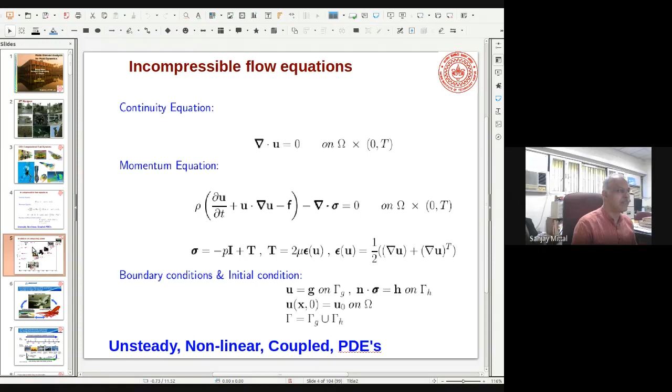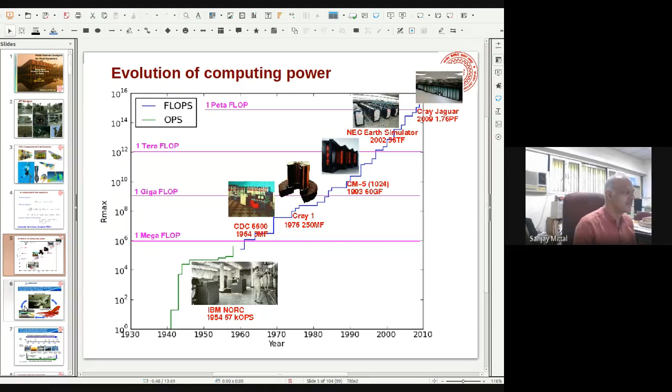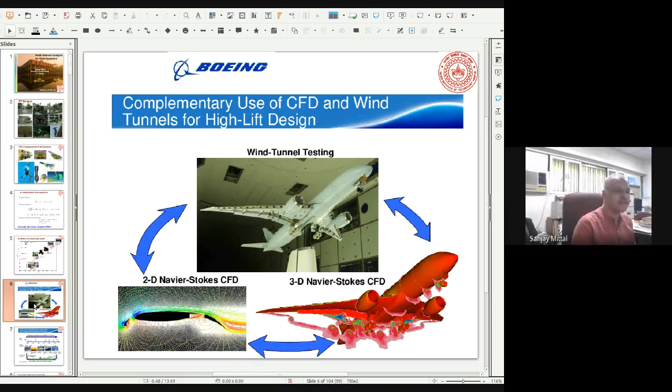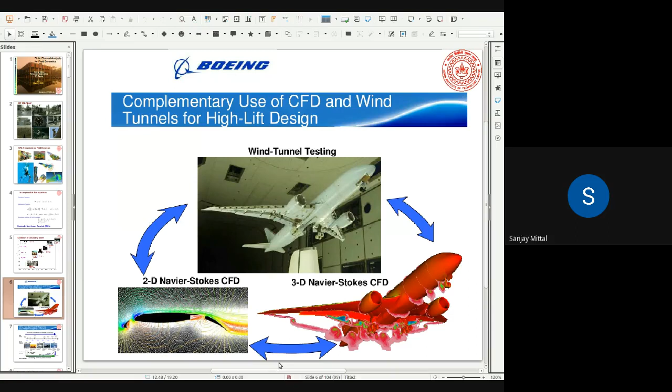But just to give you an idea that we are talking about not just in a laboratory scale. People are actually using this in commercial setting. So here is a slide from Boeing where they suggest that all their studies are done using these three tools: 2D CFD, which is kind of cheaper, then the high fidelity three-dimensional CFD, and then of course the main wind tunnel testing, which people swear by.

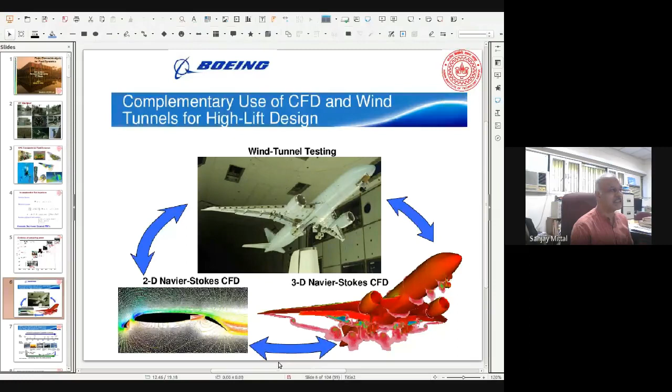So what typically they would do is they would do very few tests with wind tunnels, and most of the tests are done using 2D CFD, and very few tests would be done with 3D CFD. And wind tunnel testing is just used to kind of validate the data and make sure that everything is working fine.

Here is a picture again from Boeing, which kind of tells us what is the level of tools they have used over the past few decades, and what is the complementary effect of CFD and experimental aerodynamic study. So the top row shows the tools. So they had some panel codes, Cartesian grid techniques, then they had some finite volume codes, and in fact now they exclusively use finite element codes on unstructured grids.

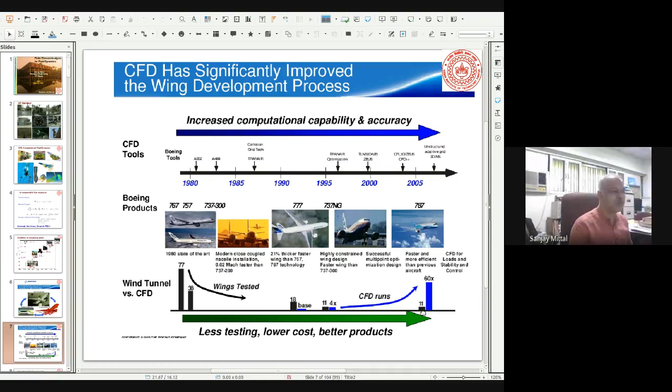And in the second row you see their products, okay, the 767, the 737, unfortunately, which is going through a crisis, and the Dreamliner and so on. And on the last row you see the tests that they have done. So you can see back in the 80s, most of the products that they designed, they heavily used wind tunnel testing. But now if you look at the newer designs like the 787, they use mostly CFD and very few wind tunnel testing. So there has been a certain shift.

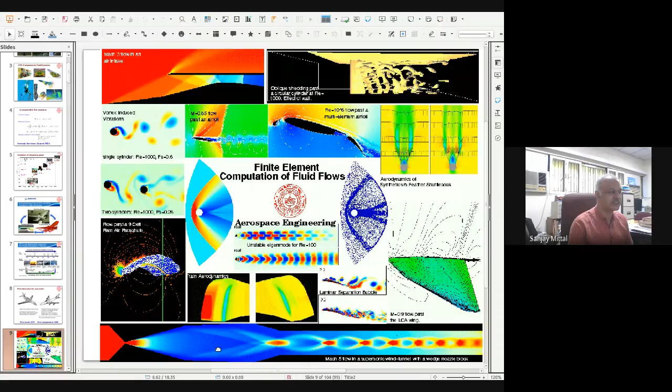There was a project we undertook for trains. So what if we want to retrofit some locomotives for higher speeds? So this was sponsored by the Indian Railways. They wanted some quick answers because there was some plan to increase the speed of all locomotives across the nation. I'll show you some examples of ram air parachutes, so I will not say much about that here. And then if you want to design wind tunnels, high-speed wind tunnels, you can actually use CFD to do that.

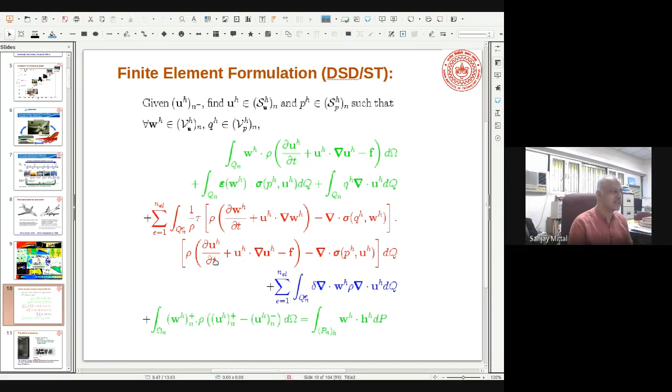And then the blue and the red terms are essentially the stabilization terms, because it turns out if you just use the Galerkin method for these parabolic equation systems, which may actually tend to hyperbolic for high-speed flows, then you can get all kinds of instabilities. So you have to numerically add some terms to stabilize them. So we use something called the SUPG, the streamline upwind Petrov-Galerkin, and the PSPG, pressure stabilizing Petrov-Galerkin, and some other terms for least squares of the continuity equation. So I'm not going to give you too many details about this, but if there are questions at the end, maybe I can address them.

Okay, so once we have an algorithm, the next challenge is to put it in a parallel framework so that we can actually do large scale problems. Okay, so shown here is the first Linux cluster that we acquired at IIT Kanpur from DST, and this had 32 nodes, 64 processors, and the backbone was a gigabit switch.

So what we want to do is, because it's an unstructured mesh, we really want to make sure that each processor receives some elements, but the communication between them should be as little as possible. They should kind of work independently. So we use this domain partitioning technique, wherein we divide the whole domain into these partitions so that the elements at the interface are minimal.

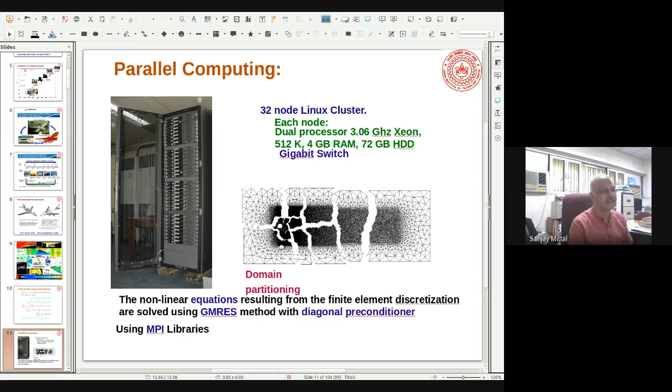Okay, so essentially the idea is that you make volumes which have least surface area. That's the kind of approach that one takes, and then you distribute each one of these clusters to a processor on your parallel machine, and then let them compute in parallel. And of course, they would need information at the interface, but hopefully that information is not so much, and therefore you can get fast calculations.

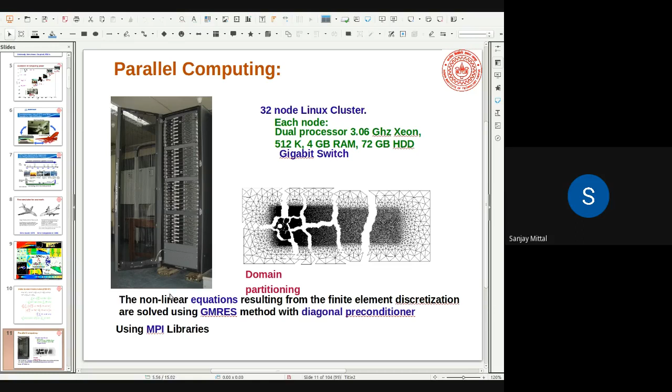And typically we use MPI libraries, message passing, and the solver that we use is based on GMRES with some preconditioners. Typically the data structure consists of three levels: the nodes of a mesh, then the elements, and then the equations. Those of you who are familiar with the finite element method will realize that the integrals over the domain happen over elements, but the information is stored at nodes, and of course calculations are done at an equation level. So one has to go back and forth between this triad and make sure that the data structure is efficient.

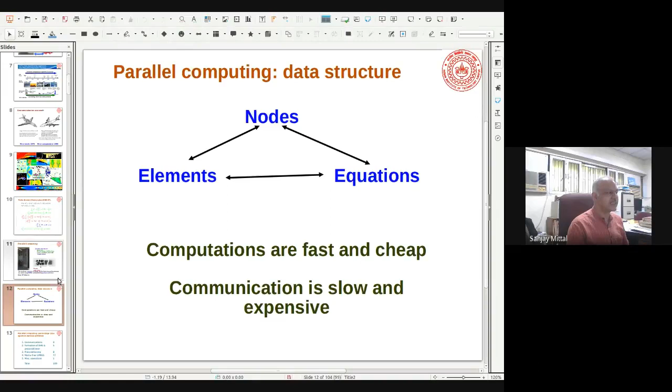So the underlying mantra is that calculations are fast, but communication is expensive. So you want to communicate as little as possible. Of course, you cannot eliminate it, but you want to minimize it. So that's the underlying design of the algorithm. Just to give you an idea about the time that one would spend in various activities: in the codes that we have, you spend almost 80% of the time in the solver, Ax = b, and the communication uses only about 10% of the total time.

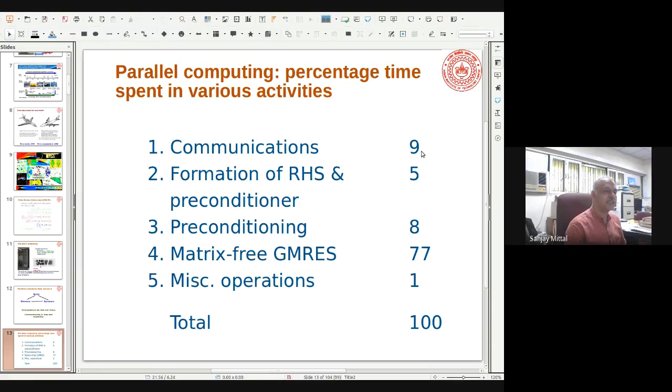Okay. Now mind you, as you go to larger machines, if you take bigger problems and you have bigger computers, then of course you would have more processors to communicate with, and the processors also become faster. The processor that we have today is much faster than what we had maybe 2 decades ago. But communication has not increased speed by the same level; that has increased at a very small rate. So as you get faster and bigger computers, you can churn out things faster, but then the communication becomes a bottleneck. So one problem with scaling up these calculations is that with time, as your computers get faster, your cluster actually becomes more inefficient.

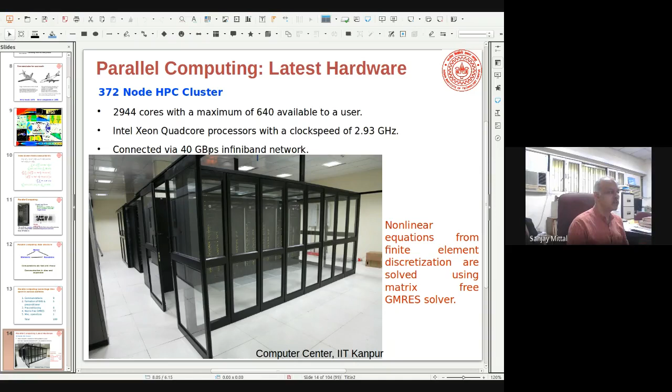Okay, so this is a computer that we have at our institute. It is shared by the whole institute, about 3,000 cores, and roughly 640 would be available to a user because multiple users are running jobs. And the backbone is an InfiniBand, about 40 gigabits per second. So I want to show you some scaling studies of how these calculations scale up. We talk about something called a speed up.

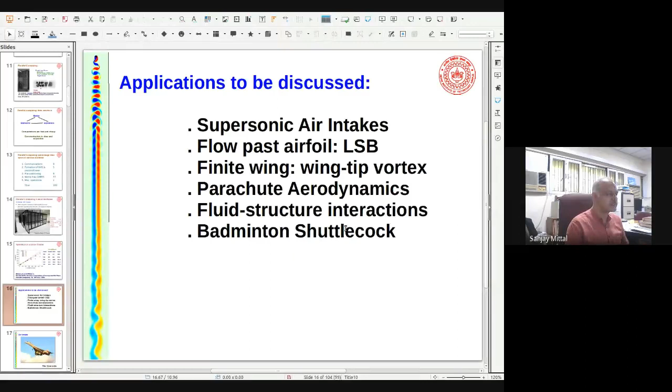Then we will talk about an airfoil, then an airfoil being modified to a finite wing where you would get a wingtip vortex. Then I'll give you some ideas of parachute aerodynamics, some fluid structure interactions. And this last one is really time permitting. I don't think I will have enough time to reach there. But if I do, because I have interest in sports aerodynamics, I'll show you some analysis that we've done for badminton shuttlecocks. Okay, so first air intake.

Please excuse me, I'll just take a drink. Just my throat is getting parched. Sorry about that. All right, so maybe I'll just check. Dr. Thakkar, is everything going okay? Are you able to hear me? Yes. Okay, great. How much time do I have, roughly? You are still having about 45 minutes. 45 minutes, great. Okay, thank you.

Essentially, there are these engines which power the aircraft. These could be turbojet engines, these could be turbofan. For the Concorde, they are actually turbojet engines, and these are called air-breathing engines in the sense that as they fly, they capture the air from the atmosphere, and that air is mixed with the fuel inside the engine, and the burnt fuel and air mixture is expanded through a nozzle, and that's what gives you the thrust. And of course, there could also be a fan which gives additional thrust.

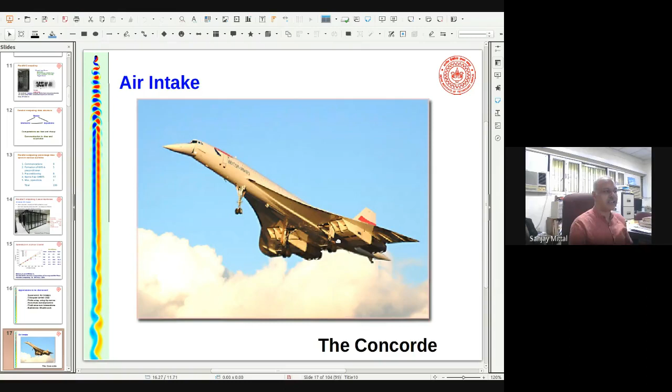So let me show you the next picture. This is a closer view of the air intake of a Concorde. The air goes in through these pods, and there are engines downstream of it. So the high speed air should be slowed down to low speed, and it should be done in an efficient manner, in the sense that the kinetic energy should still be converted to high pressure, and the engine should receive a mass flow at a uniform velocity profile.

Okay, so that's the job of an air intake. It's a passive device, but the design is very important. Otherwise, you would get all kinds of problems with the engine.

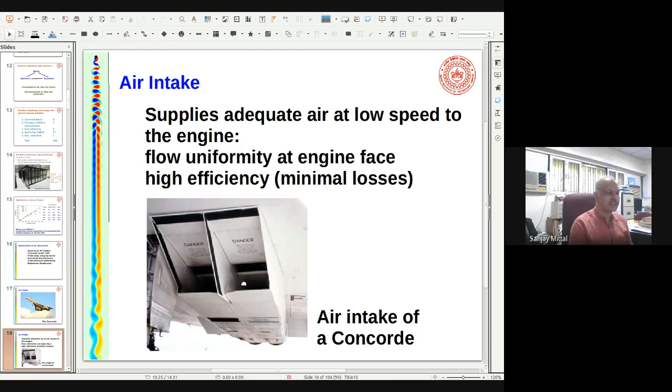Here is a more complex air intake for a reusable launch vehicle or something like a space shuttle. So on the belly of this aircraft, you would have an engine, and a close-up view is shown here on the lower view graph.

So there's high-speed air coming in, then you would like to slow it down through a set of shocks. So you can see there are two shocks, first one at one ramp angle, then another one, and then hopefully there's a strong shock here, a normal shock, after which the flow becomes very slow, subsonic. Then you inject fuel, the combustion takes place, then you expand it, and that's what propels your aircraft.

So we would like to do the analysis of this air intake and understand the dynamics of it, what one can do or what one cannot do. So let me therefore explain to you. Maybe I go to the previous slide and explain to you from the pilot's point of view what the pilot sees.

So the pilot is sitting in the cockpit, and he is controlling the speed of the vehicle through a variety of parameters, but primarily through throttle. Throttle is essentially the fuel control. So when the pilot wants the aircraft to move faster, he increases the fuel flow rate. So he puts in more fuel, just like in a car you would step on the gas.

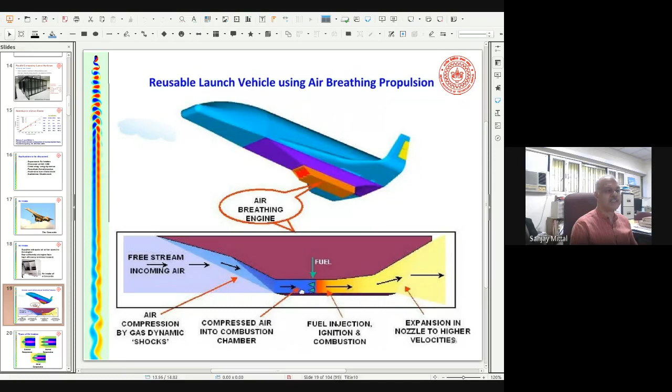So when you go to high speed flows, you can essentially have these different kinds of intakes. So this is an external compression intake. You can see in this view graph, there is an engine cowl. You can think of it as an axisymmetric engine. So the black line is the engine cowl, and there is a center body. This forms a conical shock, and then a normal shock exists at the lip of the cowl and the center body.

So this flow is subsonic. That's why it is shown in dark blue color. So this is totally external. All the compression is taking place external to the engine. Then you could get a situation where the entire compression is internal, where you can see the engine cowl is shown here, the center body, and there are these series of oblique shocks. They reflect, and then you get a normal shock, which does the final compression, and then the subsonic flow, wherein you can burn the fuel.

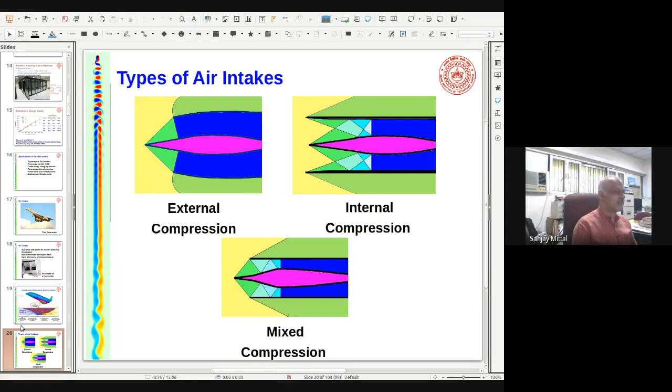Or you could get a mixed compression where the center body is slightly outside the cowl zone. So you get the mix of both external and internal. If I look at a mixed compression air intake, which is what I will show you, then you could have three kinds of operations.

The supercritical operation, where you get a series of shocks, and then the final shock that you get, the normal shock, is downstream of the throat. Throat is the minimal cross-section area of the engine. Now this is a stable situation.

So I am not going to elaborate on why, but please take my word for it, that an engine would be stable if it has an operation such that the normal shock is downstream of the throat. Okay. So this is a good operation. The only problem is that the efficiency is low.

As you are aware, there are losses across a shock. So I would like the shock to be as weak as possible to get minimal losses. The shock is weakest when the Mach number is close to 1, and that happens near the throat. So that leads to the critical operation. So this critical operation is the most efficient operation, but it is marginally unstable in the sense that the shock is sitting at the throat.

If there is a small fluctuation inside the combustion chamber, this shock can move upstream, and the moment it moves upstream, that would lead to a subcritical operation, which is unstable. So this is very dangerous, the subcritical operation, in the sense that this shock will be thrown out of the engine, and there would be very few air particles that come into the engine, and the engine would get starved, and you would get virtually no combustion. Okay, so that's dangerous. You don't want to do that.

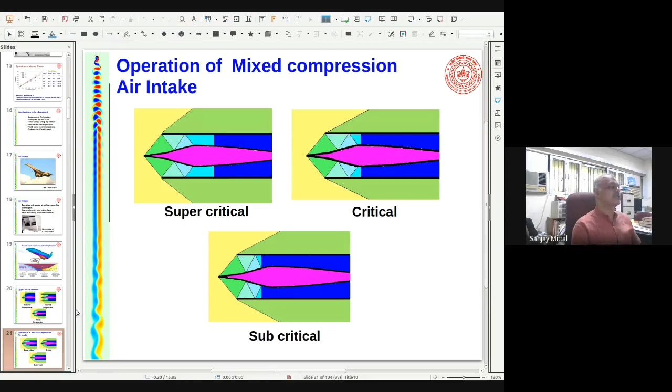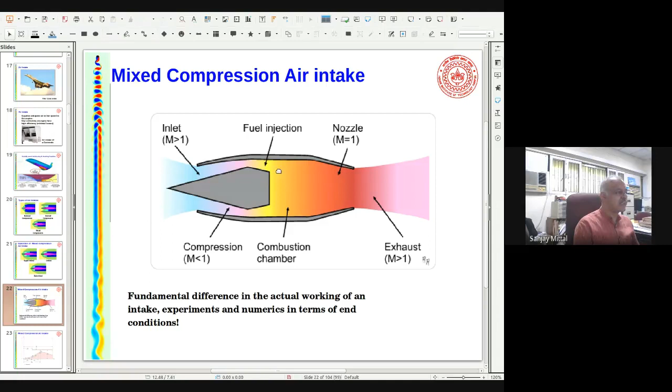Okay, having shown you the physics, now let me show you some CFD results. So here is a model of an engine where we will not worry about the combustion. So we are only going to worry about the air intake part and apply a back pressure simulating an engine and look at the performance of the intake. So this is the geometric model.

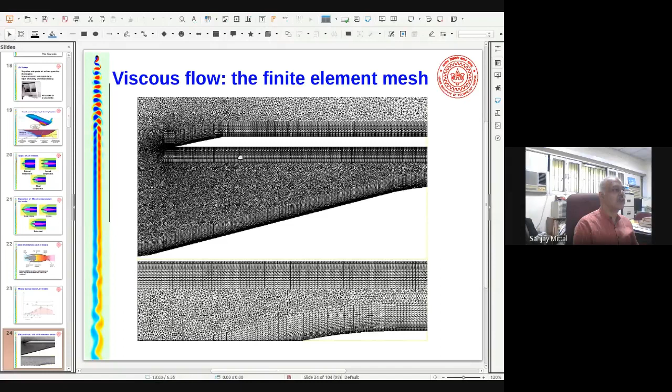So we will have two ramps, a shock coming from the first ramp hitting the lip, another one hitting the lip, then some reflections, and then the throat, and we would apply a back pressure downstream of the intake, which of course is feeding an engine, but we are not simulating the engine. Okay, this is a finite element mesh. So we have a fine mesh close to the cowl of the engine, to capture the boundary layer and so on.

Typically what aircraft do is they apply boundary layer bleed. So there's a perforation on the cowl and the ramp, and some boundary layer is sucked out, and therefore you can control the boundary layer and get a good flow. So the first question we asked is, what kind of bleed should we apply? Where should we apply the bleed?

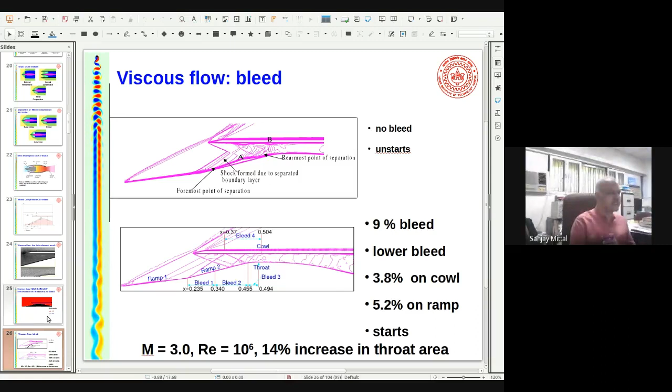So calculations were carried out. So this is a picture of the case with no bleed. So we kind of figured out where the boundary layers are separating. Then we applied bleed. So here is an example where we applied 9% bleed both on the cowl and on the ramp, and that leads to a start of the engine. So let me show you an example. So this was without the bleed. Now let me show you an example with bleed.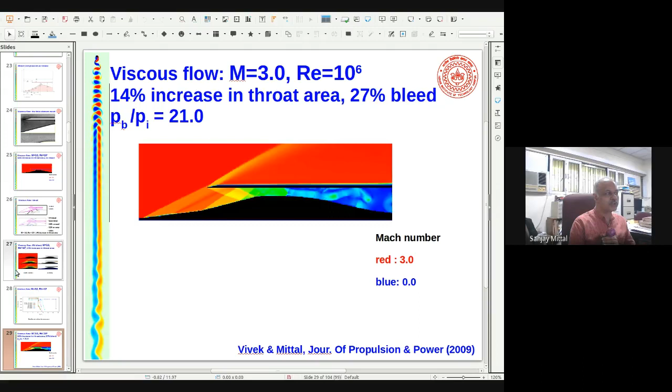So one of two things can happen as you increase the back pressure. A, the engine can completely unstart, and that's the end of the situation. Or you can get an instability which is called buzz. Okay, so buzz, as the name suggests, is a buzzing sound, a very high frequency sound, where the boundary layers and the natural frequency of this engine duct interact, and the shocks will go back and forth. So I want to show you some animations of a buzz instability.

So I'll show you two types of buzz instability. There's something called a little buzz and another one which is called the big buzz. So the little buzz is because of shear layer instability. It's a little bit weak, and the big buzz is really very heavy instability, which is driven by the acoustic waves, and they are both driven by the acoustic modes of the pipe. So the resonant frequency can be determined by the pipe.

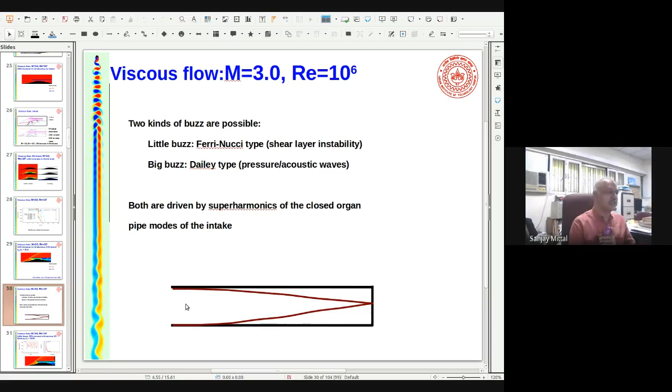So shown here is a quarter wave inside a pipe. So you can imagine that there's an engine which is applying a back pressure, so that's like a closed end, and then there's an intake which is the open end, and a wave could sit here. And so here's an example of a little buzz. Please take some time and enjoy it, and I'll explain to you in a moment.

I'll now show you an example of a big buzz. So here is a big buzz, which is actually very high frequency, and you can see massive flow separation, driven by a completely acoustic instability. You can see massive flow separation. Okay. In fact, it's interesting.

So if you look at each cycle, for the majority of the cycle there is flow going through the engine, but then there is a part of the cycle in which the flow reverses. So the flow goes from the plenum back into the throat and outside the air intake. So it kind of spills over the cowl, and that's not healthy. So you don't want the pilot to go through this instability.

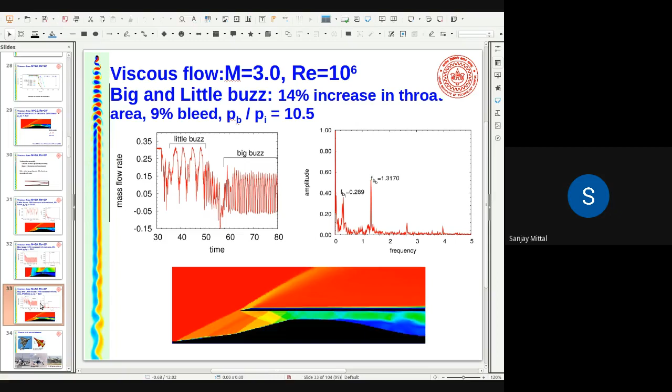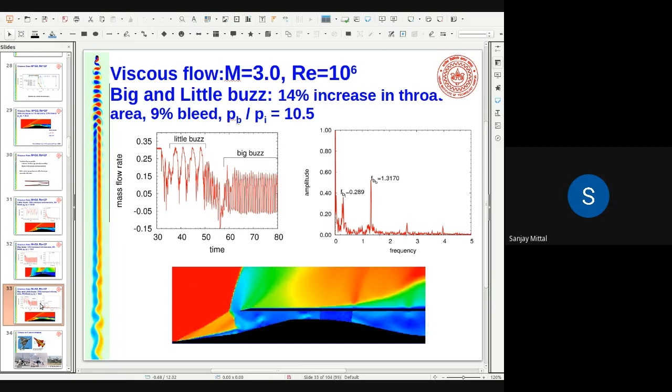Okay, you can get an instability which starts with a little buzz and then goes into a big buzz. So here is an animation. I'll just play it so that you can enjoy it. So this is a little buzz, and at some point it will become a big buzz. Yeah, here you go. Now it has become a big buzz, a massive flow separation.

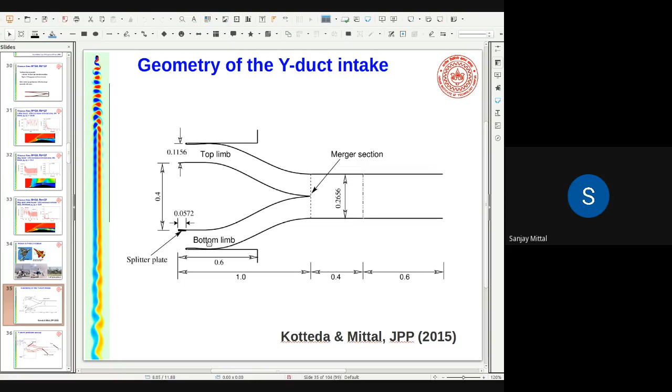Okay, so those were aircraft at very high speeds. But what about fighter aircraft like the light combat aircraft or the advanced medium combat aircraft, the AMCA? Then you can have these Y-ducts. Some pictures are shown here, and very quickly I want to show you the instabilities in a Y-duct. So you have these limbs, top limb and bottom limb. There are two ducts, almost like the nose of a human being, and they get connected maybe to the lungs. So this is the tracheal column.

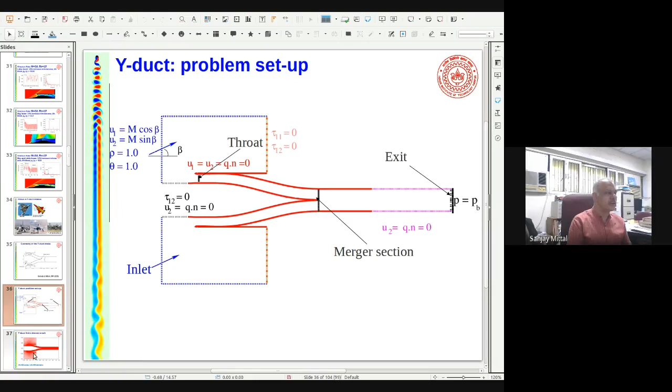So what happens when the aircraft is in a side slip? It's doing a maneuver where the flow is not symmetric. Then maybe you could get a higher mass flow rate through one duct and a lesser mass flow rate through the other, and then interesting things can happen. So we want to simulate that, and these are the boundary conditions, but I will not bore you. A finite element mesh. This is how a typical flow looks. This is a numerical schlieren where you can see the very interesting shock structures.

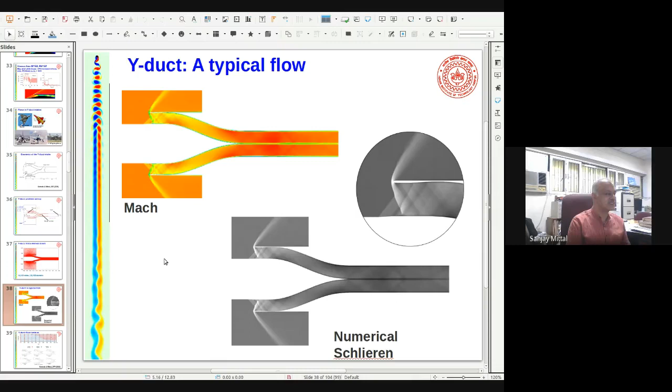Unfortunately, I am running out of time. Dr. Thakur, how much time can I take at the most? You can take, sir, 15 to 20 minutes. 15 minutes, okay. Thank you. All right. So I'll try to finish as soon as I can.

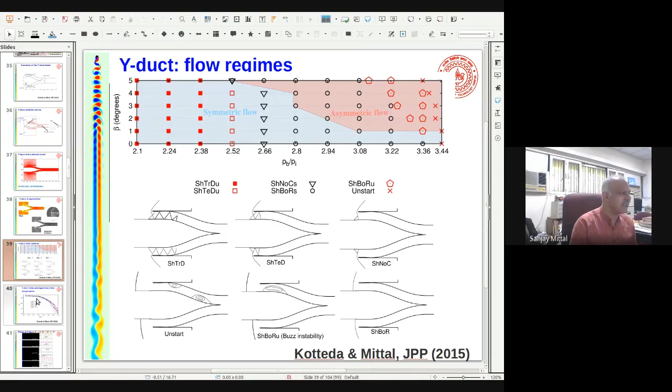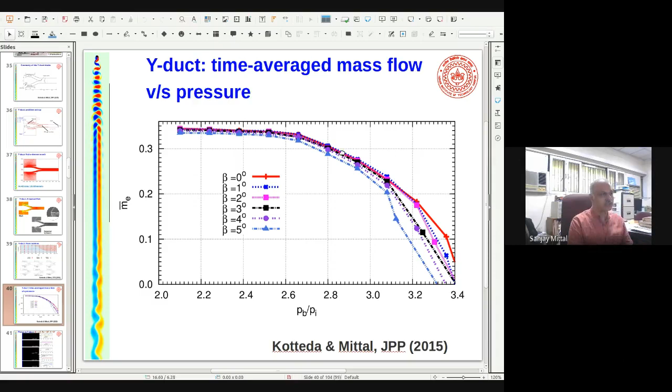So maybe I show you this picture of what happens to the mass flow rate through the engine with back pressure. Just like you saw in the earlier intake, you get a good performance up to some back pressure and then it starts deteriorating, and that's no good. We actually want a high mass flow rate through the engine throughout the design regime. So I can show you some results from simulations. As you increase the back pressure, the flow goes through some very interesting changes. The plots are the mass flow rate through the upper and the lower limb. Unfortunately, I don't have time to show you the details.

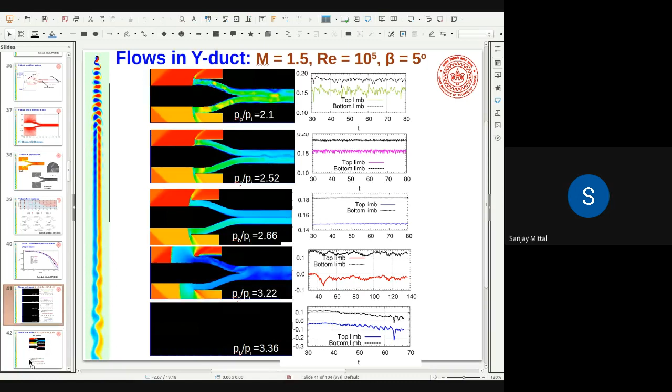I just want to highlight a case of buzz instability, which is very catastrophic, and you want to avoid that. So I'll show you the last case, pressure ratio 3.3. Let me show you the animation. So this is what is called a buzz instability. The side slip angle is 5 degrees, and typically the flow goes in through the lower limb and then comes out at times through the upper limb. It is just like in yoga you do jal neti, where you put water in through one nostril and it comes out through the other nostril.

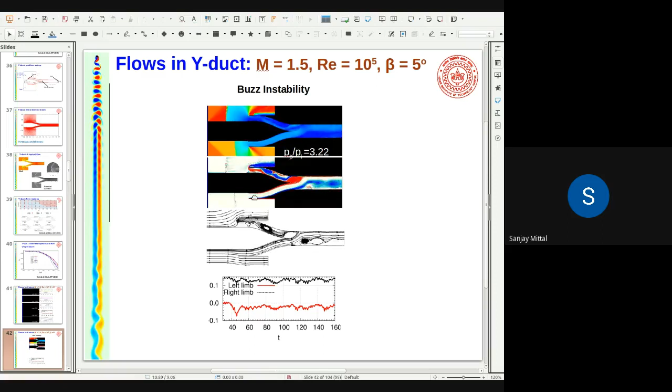Because your aircraft is side slipping, the air goes in through one limb, meanders through this path and comes out through the other limb, and the engine gets completely stopped. In fact, that is what is happening to the mass flow rate. Through one limb you are getting a positive mass flow rate, and through the other you are getting a negative mass flow rate because the flow is going in the reverse direction. This is an absolute no. You don't want this in a fighter aircraft. This would be a disaster.

Unfortunately you cannot study these things in experiments because the time scale is extremely small. The velocities are so high. So CFD is a very good way of looking at these instabilities. And maybe we move on now.

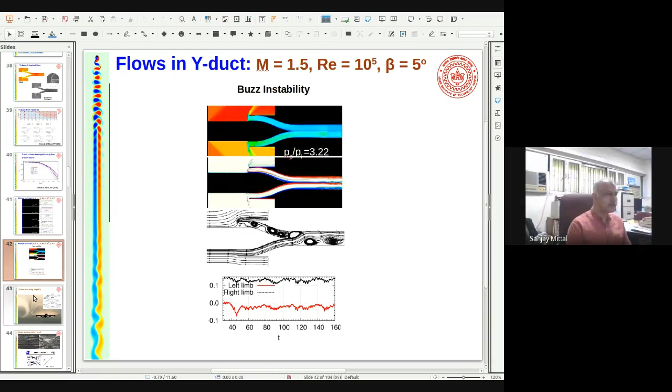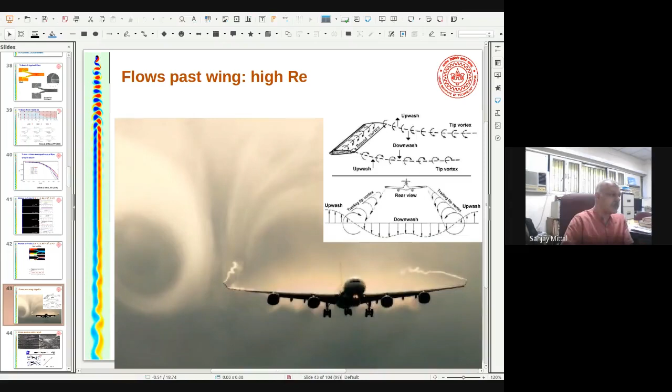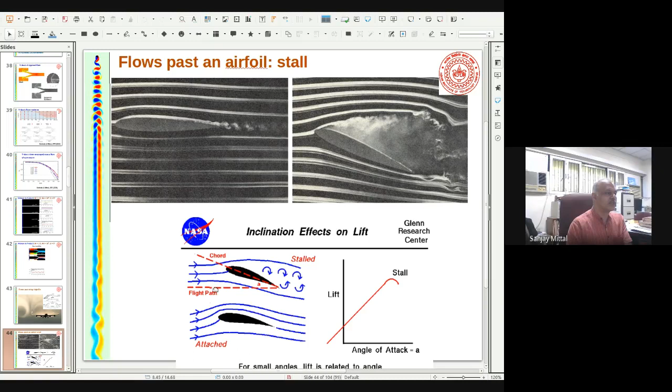So for those of you who are not from aerospace, I just wanted to show you some slides from a site at NASA. So what happens at low angles of attack and high angles of attack? So angle of attack is essentially this: for the airfoil, if I draw the chord line and I draw an angle with respect to the flight path, that is the angle of attack, which is marked here as A. So at low angles of attack, you get an attached flow. These are streamlines, smoke visualization. And then if you increase the angle of attack, you get a massively separated flow.

Okay, so of course, if you are interested in the lift on an aircraft, then as you increase the angle of attack, it increases linearly up to some point, and then because of the separation, it then decreases, and that's called a stall. And you could get very high drag. Okay.

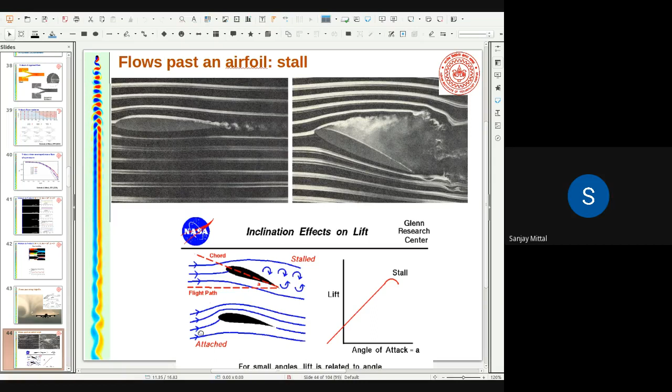Okay. So we did some calculations at Reynolds number 46,000 for an Eppler airfoil, and the magenta color are 2D calculations, and what we found is it doesn't give a stall. So x-axis is angle of attack, y-axis is lift coefficient, and of course on the right is the drag versus alpha. So we were shocked to see that if you do 2D calculations, you don't see a stall at all. The lift just keeps on increasing. And of course this is wrong.

There are two sets of experiments, from the group of Burns and another one, Mueller. So the red line and the black line. There's a considerable difference between them. I don't want to discuss why, there's a reason for that. But notice that they see a stall. So then we tried 3D calculations, and of course we also saw a stall. Okay, so the results are reasonable with 3D calculations, and 2D calculations are actually junk. And in fact, you can see the difference: 2D gives very different results than 3D.

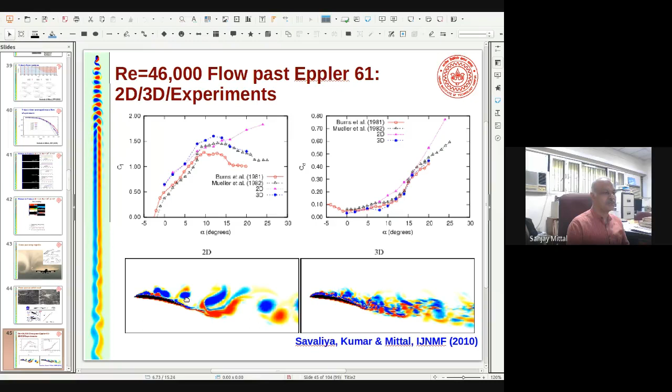So we then did 3D calculations to understand flow over an Eppler airfoil. I'll skip a lot of slides and maybe just show you something which you might find interesting. So if you keep the angle of attack at 10 degrees and do calculations at different Reynolds numbers, typically what people find is that you get some 2D flow at very low Reynolds number. This is a little bit more than 1000. Then you start developing these hairpin vortices which become kind of complex, and then you can see the complexity in the flow, and here at around 87,000 you can see a completely turbulent flow.

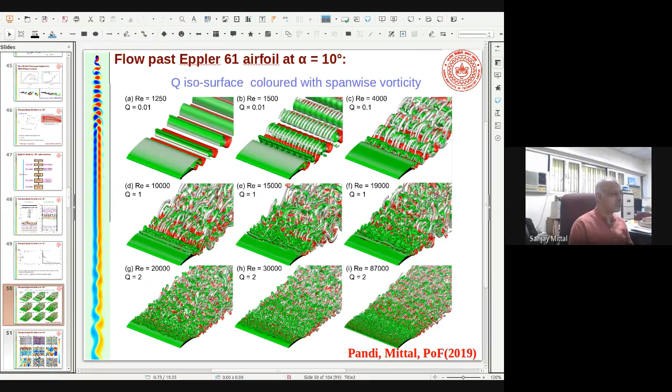So in this work, which if you are interested you can look at in this 2019 paper, we've been able to show how the flow goes from a two-dimensional state to almost a turbulent state at a Reynolds number of 50,000 to 90,000. In fact, if you look at the spatio-temporal evolution of the flow, the x-axis is the time, the y-axis is the span direction. You can see the complexity of the flow. So we have shown the local lift distribution across the span going from a very nice periodic flow to an extremely chaotic flow when it becomes completely turbulent.

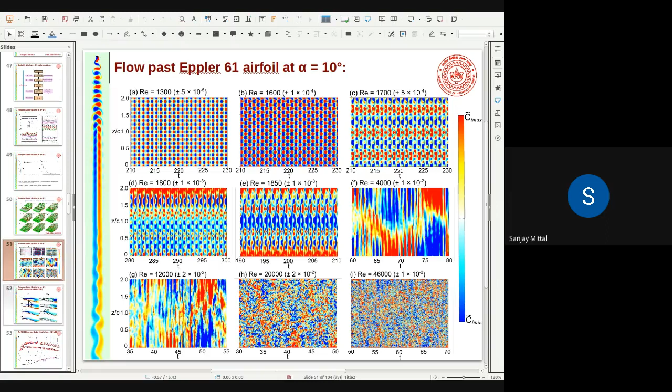There's an interesting feature called the laminar separation bubble. This happens at around Reynolds number 20,000. So you can see up to Reynolds number 19,000, if you time average the flow, there's a big recirculation zone. But at 20,000, the separated flow becomes turbulent, and then it reattaches, and there's a massive increase in the lift. So if you held the angle of attack constant but changed the Reynolds number, then you would see a low lift up to some point, and boom, at some Reynolds number the lift would dramatically increase. That's because of a laminar separation bubble.

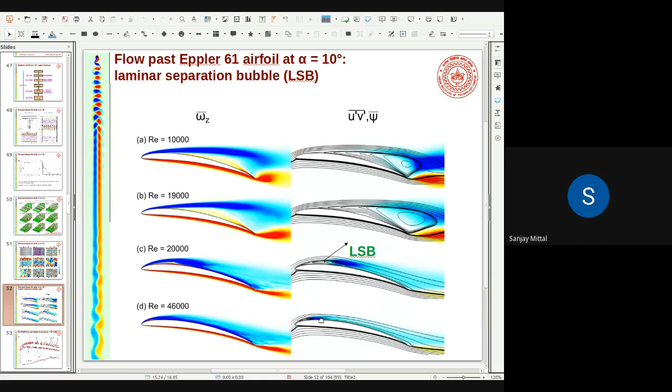So now here at 46,000, the bulk of this flow is turbulent, and it is an attached flow. In fact, the velocity profiles are very interesting. These are the velocity profiles at different sections. I've shown a profile going through the separation bubble. There's a recirculation zone, and then downstream of the bubble you can see a linear profile followed by a log law, which is shown in this picture. It matches very well with the log law, thereby confirming that it is a turbulent boundary layer. Okay.

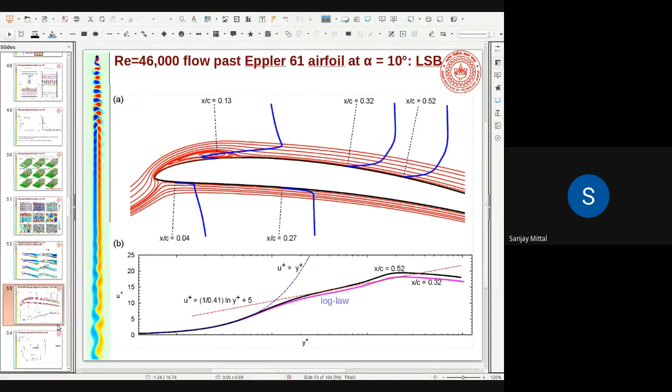Some calculations for the effect of the wingtip vortex. So we have taken a finite wing now. So there's a wingtip vortex that emanates, and there's vortex shedding going on from the root part of the wing, and then we want to see what is the effect of the aspect ratio, and you can see it's a very complex interaction.

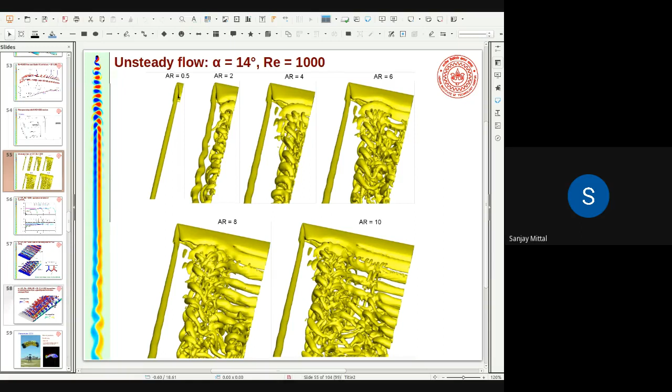Unfortunately I don't have time to show you the details. Maybe I'll just show you one picture. Here in the top row there is the end-to-end wing, almost like an airfoil, where you see very nice hairpin structures. This is a Reynolds number 1000, and angle of attack is 14 degrees.

But the moment you go to a finite wing where you have a wingtip vortex, then these flow structures become very complicated. So in addition to these hairpins, you get this three-dimensionality, and some extremely interesting vortex linkages that lead to incredible change in the performance of the wing.

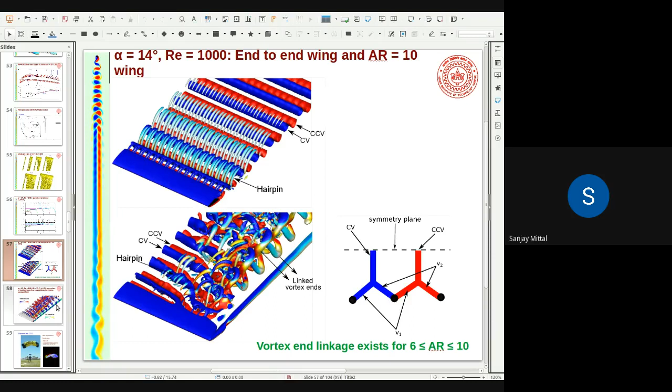So I think to end, maybe I'll show you one more calculation, which you might find interesting, and then I'll stop with that. Let me see. Okay, maybe this one would be good.

So we are trying to do fluid structure interaction, wherein we are interested in finding out if I push in fluid at a high pressure inside a balloon, can I predict the shape of a balloon? So you can imagine that there is a membrane, and we are doing fluid structure interaction. So flow inside the balloon and outside the balloon is being simulated.

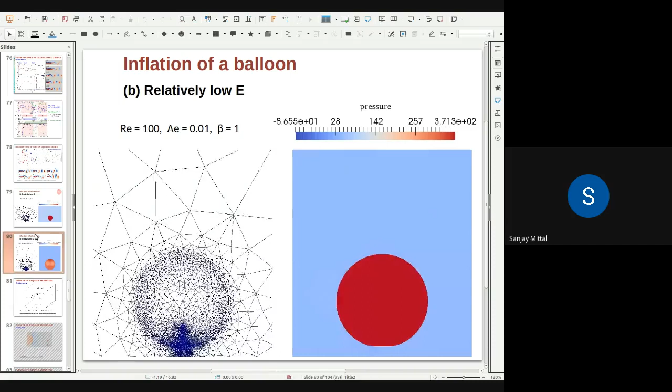Maybe one last image of a fluid structure interaction, and then I will stop. I'm sorry for having taken so much time. Let me see which is the most. Okay, maybe this one you may find interesting.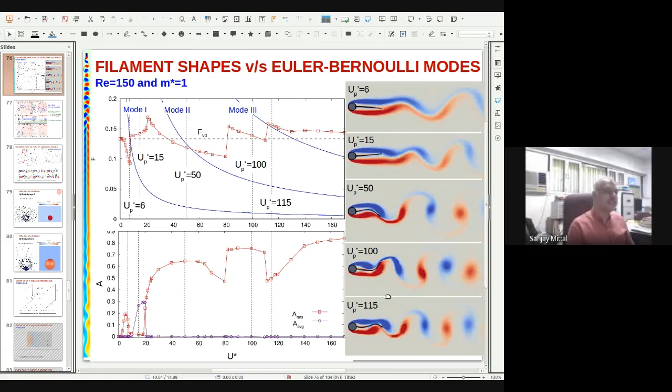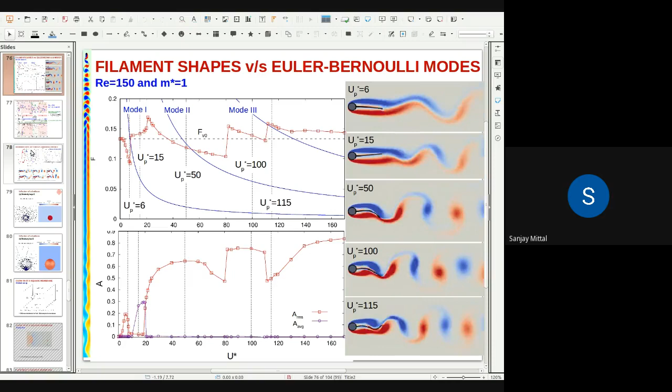You can get all the way from exciting the first mode to the second mode to the third mode, and possibly third and fourth mode. And you can get very interesting vortex shedding patterns. And I will just show you one last slide which kind of highlights the vortex shedding patterns.

So you can get the 2S pattern where one pair of vortices is released, or you could get two pairs of vortices released in the wake, or maybe two pairs and two single vortices, and so on. So it is very exciting.

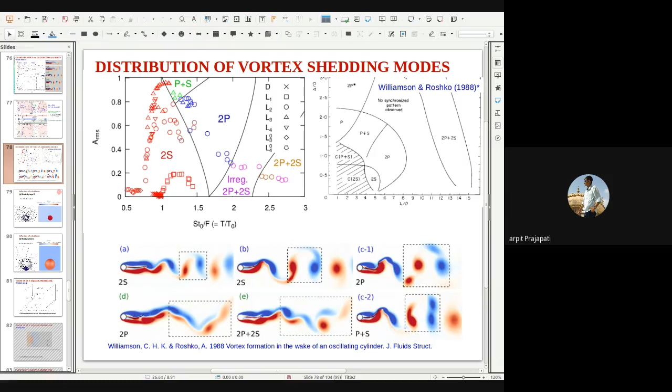I want to ask how the selection of air intake of the aircraft and the duct of the aircraft will change the RCS of the aircraft. Oh, I see. Okay, very good. So I think your question is about the stealth aspects and the performance. So very nice.

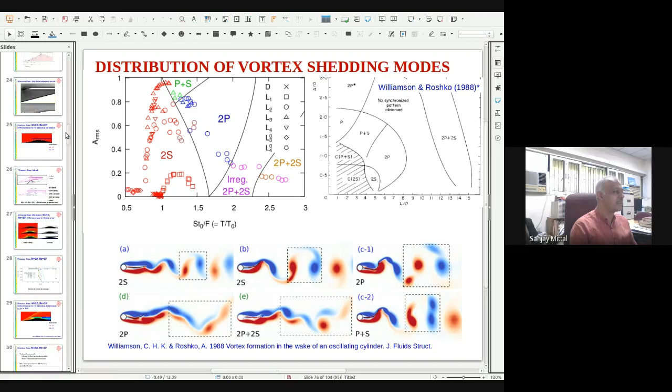So typically what happens, maybe I show you some pictures of these aircraft, and that would answer your question partly. Yeah, let's look at these aircraft. So typically when you have fighter aircraft, stealth is a very big issue, that you don't want the enemy to know that your aircraft has approached. So you want to evade the radar.

So typically, one of course is the RCS, where the electromagnetic waves can reflect. So that is one aspect. The other is the thermal signature of the engine, because the engine gives out very hot exhaust, and one way to fool the radar is that it should not see the hot spots.

So typically in fighter aircraft, you don't want your engine flame to be in the line of sight. So that's why you can see they would curve the intakes, so you should not have a situation where you can have an electromagnetic wave going in through the intake upstream, and it can be in the line of sight of the fire of the engine flame. So that's why you bend them so that it doesn't reach it.

Okay. So typically when you have these Y-ducts, or you can even have twin bends in the ducts, they would typically enhance the stealth capability. Okay, but they are bad for performance. So the higher the bend or the curvature in the intake, the worse will be the performance, because you will have all kinds of flow separation. So typically in these aircraft, there would be an optimization that you would have to carry out between the stealth capability and your engine performance.

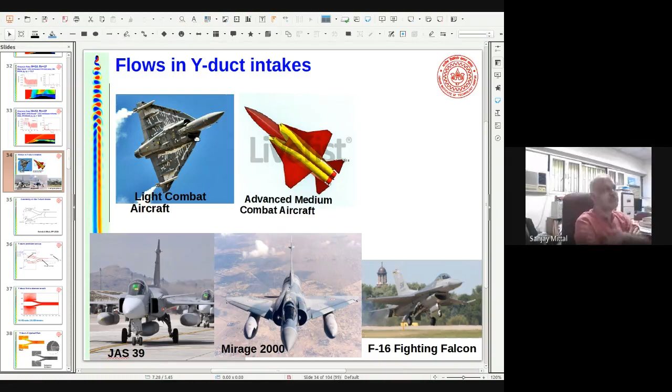So the light combat aircraft has a Y-duct, where two intakes merge into one, which is the calculation I showed you. But the AMCA is actually twin engine. So each one of them is a separate duct, and it's called an S duct. So it's a serpentine duct, but the two of them are not joining. They are feeding independently to each engine. So the dynamics there is quite different than the dynamics of the Y-duct of the LCA. You are absolutely right.

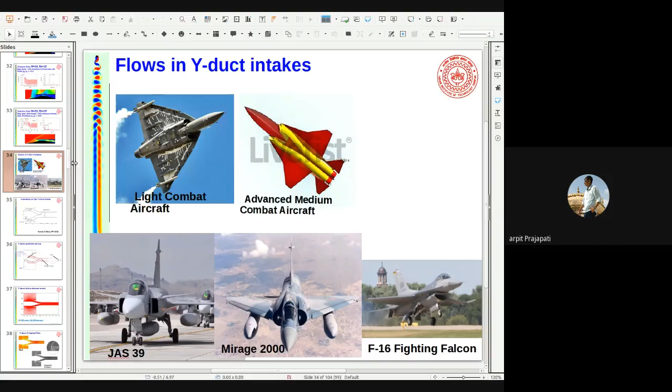Sir, last question. It is a little bit off our topic, but sir, in the first two slides, I have seen the model of LCA Tejas and the temperature distribution of our hypersonic test demonstrator vehicle. So IIT Kanpur is working with ADA and DRDO for this development?

Right. So you see what typically happens, as a nation, when you are developing some capabilities which are on the forefront, then you have to use all the capabilities present in the country. So I think what the DRDO lab has rightly done is, they have gone around and seen who is doing what, and they are trying to involve as many people as they can.

So for the LCA program, for example, I was contacted way back in '95, as soon as I came back to India. So the CFD group of the LCA, they were very kind, and they gave me an opportunity to work with them. I had very limited access to the real information, because it's all classified. But as far as the technology aspect is concerned, how things work, there is a possibility of working with them.

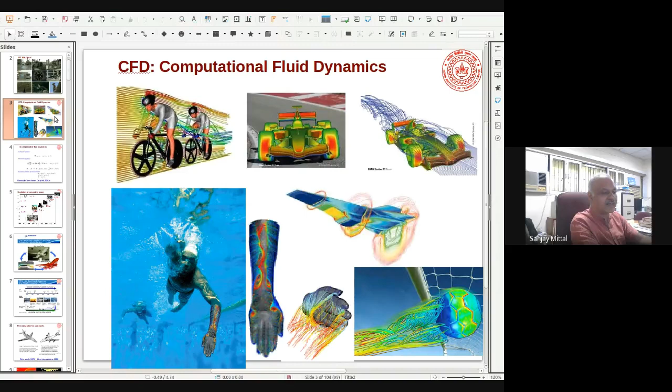Similarly, with the National Wind Tunnel Facility, we did a lot of experiments which are useful to DRDO. Some of them are dummy experiments, that don't test the real geometry or the real prototypes of what they have, but they give the flavor of what is happening, and sometimes they do real testing also. So all that is possible.

Thank you very much, sir. Sure. Yes, any other participant having any question? Good afternoon, sir. Yes, good afternoon.

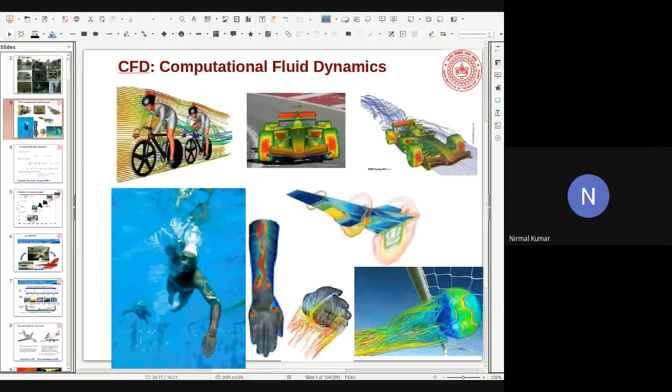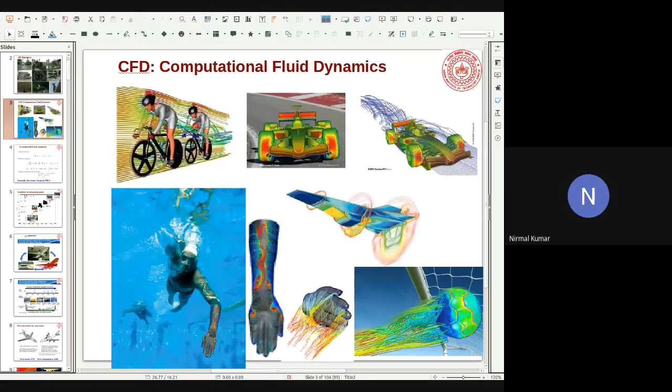Sir, I want to know, in meshing, means in grid generation in CFD, you said that the bigger the system and the more processors, the faster the result, and it will take less meshing time. So I want to know, in a supercomputer or in a quantum computer, can we do the meshing and get a fast result, or will it take the same time while solving a complex problem or large equation?

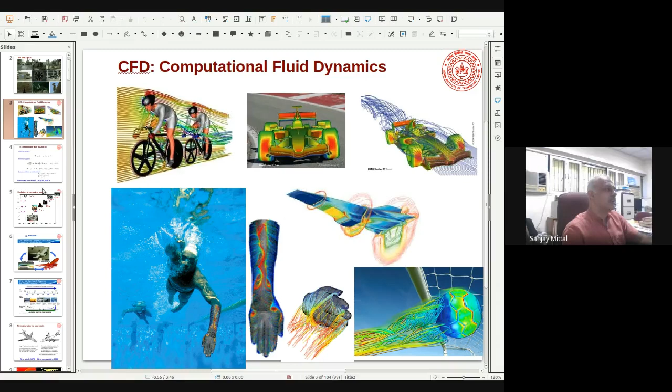If I had to define all the surfaces that make an aircraft, it is a very complex problem. Just imagine so many curved surfaces, engines, antennas, landing gear, there are holes in it. So if I make a geometry and put it in my meshing software, it should appear as an acceptable geometry. Sometimes there will be holes. I will model, for example, the wing and the fuselage, but at the junction they may not match properly. There may be some holes or some overlapping.

So even after you make a so-called geometry of a body that seems okay, when you are trying to make a mesh on it, you will have to repair it and make sure that it is acceptable for mesh generation. Typically, what people have found, even today, is that it may take several months. Suppose you give me the new, let's say Airbus 320, and ask me to do some calculations. Just to repair the geometry and get it inside my AutoCAD for meshing purposes may take several months with several people. So that's the first step.

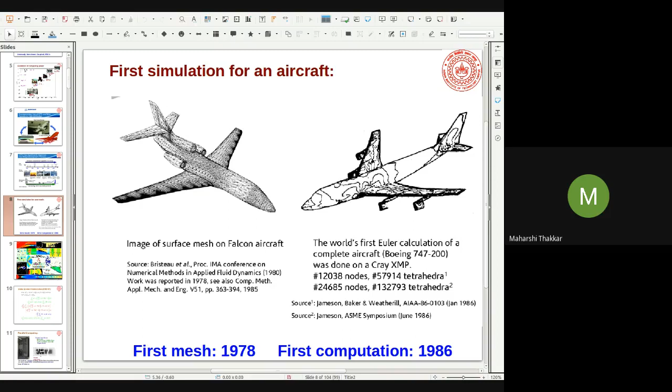Sir, there is one question in the chat box. Nainish is asking that last year Microsoft had completed a test on underwater data centers. What are your thoughts about it? The second one: is underwater data center cooling the future of cooling huge computers? Right. I am aware of some of these technologies.

So you see, like I made one opening remark, in the present scenario we first use energy to run the computers, and then we put in more energy to cool them down. So that is not a trivial cost. So if I want to make a data center, almost 50% or 40% of the money goes in buying the hardware.

Then maybe 40% goes in the support hardware, like DG set and air conditioner and whatnot. And then maybe 20% will go for the human resources. So it's a very substantial chunk of money in all of them.

Now the cooling technology has also evolved. So the oldest technology is the regular air conditioners, like the window ACs or these commercial ACs which people see in malls or whatever. Then came the era of precision cooling. So what you do is you push cold air directly into the computer in the hotspots, right? So that's why it's called precision air conditioning.

Then the third technology came as cooling door, where you actually circulate water or some other fluid to take away the heat directly, and that way the expenses would be a little bit less and it would be cost effective. Now people are coming with some other ideas, that the whole data center is located maybe underground or underwater, where it is more cost effective.